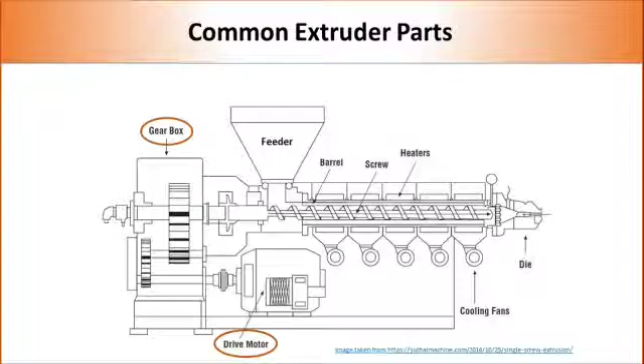Drive motor and gearbox: Finally, all extruders consist of a drive motor and gearbox to generate and transfer motion from the motor to the screw. Every component of the extruder influences the mixing quality and efficiency.

Working: When the raw material is fed into the feeder, it travels along the screw and the die cuts it into required shape and size.

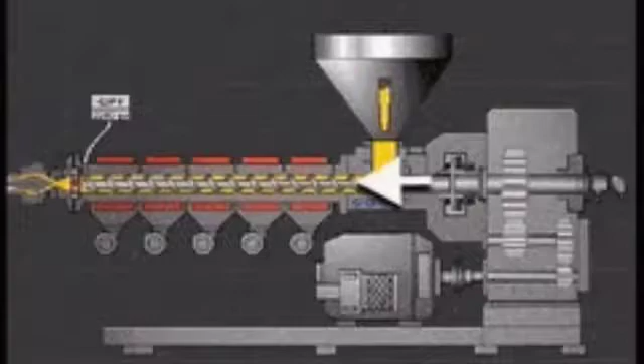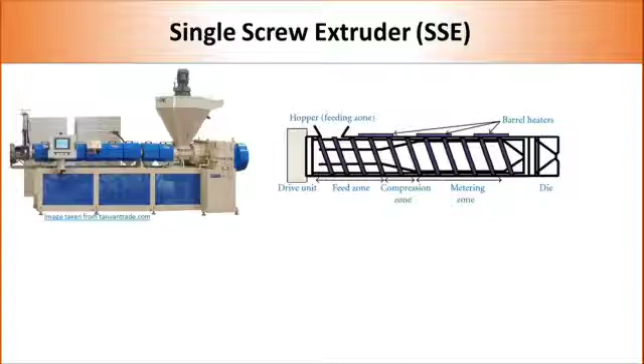Classification of extruders: single screw extruder and twin screw extruder. As mentioned previously, single screw extruder consists of a single screw. The screw is mostly a single metallic shaft containing a flight to guide the polymer inside the barrel.

And elevated in temperature and pressure. Metering section: The portion of the screw nearest to the discharge of the extruder, which is normally characterized by having very shallow flights.

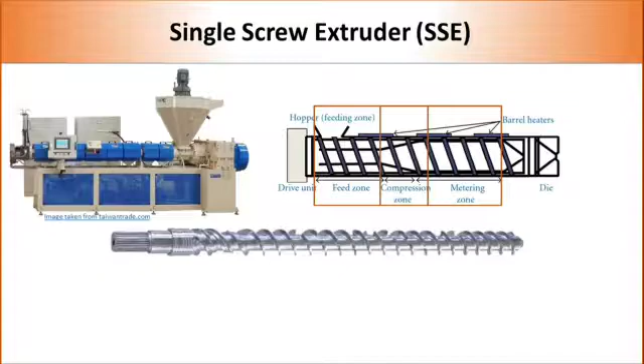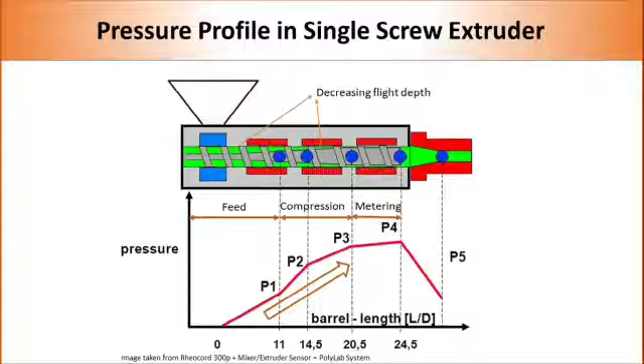The pressure inside the single screw extruder is shown in this image. We can see that the pressure gradually increases from feed zone to metering zone. The increase in pressure is related to decrease in flight depth. The pressure also reflects the amount of shear applied in each zone.

Applications of single screw extruder: Texturized vegetable protein, ready to eat breakfast cereal, production of full fat soy, pet foods, floating and sinking aquatic feed.

Now coming to twin screw extruder. Twin screw extruder is much more versatile than single screw extruders. Presence of two screws causes several variations in terms of rotation, position and time. There are several types of extruders classified based on position, rotation and time.

Based on the rotation, twin screw extruders are classified into co-rotating twin screw extruders and counter-rotating twin screw extruders. In co-rotating twin screw extruders, both screws move in the same direction, whereas in counter-rotating twin screw extruders, the screws move in opposite directions with respect to each other.

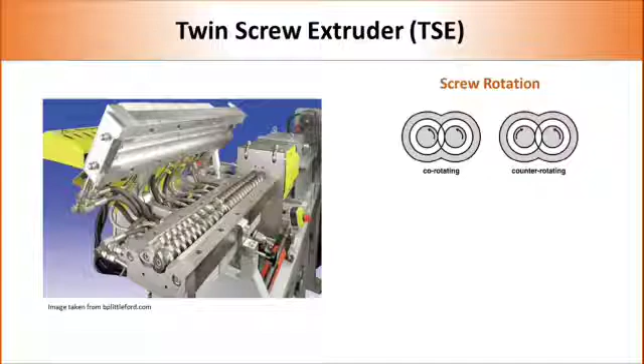In terms of screw position and screw contact, twin screw extruders are classified into intermeshing and non-intermeshing.